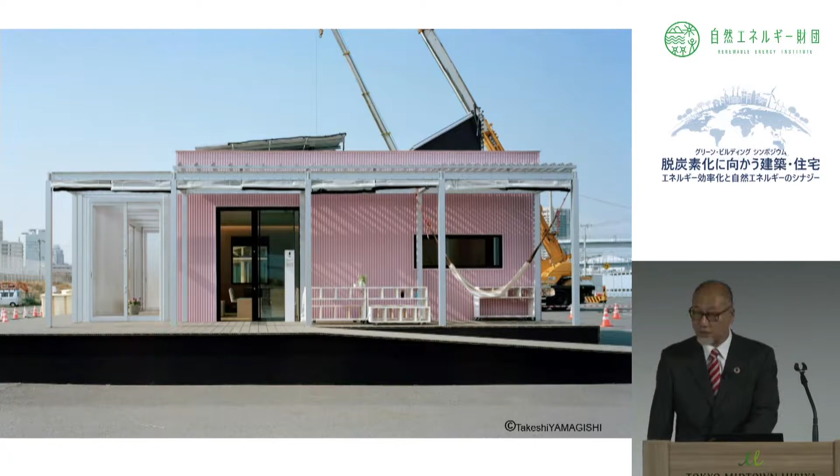ZEH. Mr. Oyama will be talking about this later, so I will not go into details, but zero energy housing, very much in the detached houses. This is the Solar Decathlon, a competition of universities. We have also competed with our designs.

What is most important, traditionally, for photovoltaics there was the FIT program. By the end of 2019, we all have to graduate from the FIT tariffs, which means increasing in-house consumption will be critical. This is our proposal. Estimating the sunlight, traditionally EcoCute would have been used during the nighttime to warm the water. But if the forecast is that tomorrow it is going to be sunny, that can be done the next day. Then it can be used as a storage battery, and the operation pattern can be adjusted. When the heat pump is used during daytime, it is efficient because the temperature is higher. So these are some of our advanced research areas.

Not only batteries, but heat storage is another important factor for collective housing. The definition of ZEH is also required for collective housing, and this is the definition for multi-family apartment buildings, for the entire building and for each dwelling unit. For the whole building, it would be difficult if it is multi-storied or high-rise, but from this year, subsidies are available, and of course, ultimately LCCM.

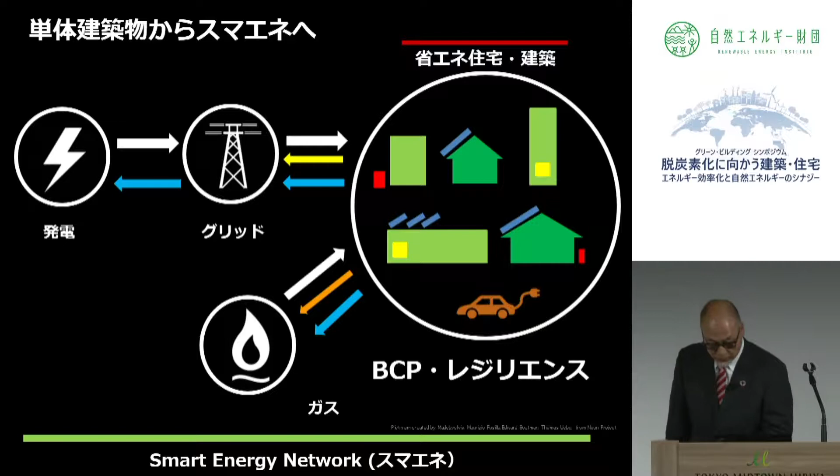Traditionally, from a single unit, it would be an entire smart energy network. Efficient use of energy for the entire network. It should be another definition. It's not energy conservation. Amory says energy efficiency. IEA also says energy efficiency rather than saving or conservation.

RE100. Promoting REs, there are many organizations and entities. Ricoh, Sekisui, ASKUL, Daiwa House, major Japanese companies are also declaring that they will go 100% renewable. This is exactly ZEB. So if zero energy buildings increase, it's a contribution to RE100.

As Professor Murakami mentioned, there are the SDGs. 7.3, to double the energy efficiency by 2030. So this is the ZEB-ready definition, a 50% energy reduction. If the operation is the same, it would be the same reduction, but at the same time, GDP should be expanded. And for promotion of that, there is ESG investment.

Large enterprises follow this principle, and then there is divestment, which is the reverse of investment, withdrawing or discontinuing investment. They will decide not to invest. They will pull out, withdraw investment, which is a major impact.

Regarding ESG investment, it's not only making money or being profitable, but non-financial or pre-financial information. It's not yet financial information, but it could be a progenitor to financial information. The non- or pre-financial information includes ESG: environment, women's advancement, comfort, wellness, or governance, including fair competition, that it is not unfair. The stock price will go down when corruption is exposed. Particularly in Japan, there is GPIF. We have a massive whale-sized pension fund, and this is promoting this investment.

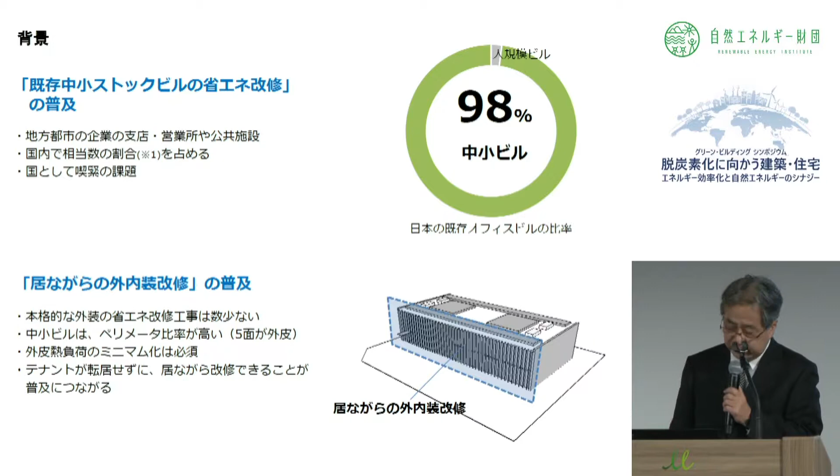So how to reduce energy consumption in the existing small and medium-sized building stock? That is the challenge. Offices smaller than 10,000 square meters account for 98% of the offices in Japan. In smaller buildings, the envelope accounts for a larger percentage. The challenge is to improve energy efficiency of the exterior, but it is important that the tenants can remain in place and do not need to temporarily relocate.

This building was first completed in 2003 and used as an office for 12 years. From October 2015, it was retrofitted within 6 months, and the refreshed building has been used since 2016. This is the inside after the renovation. On the left-hand side is the workplace. On the right-hand side is the communication area, the shared space. There is a glass partition surrounding the filing area. The northwest and southeast are full curtain wall.

This is the spec. It is in Chiba City, 2 stories high, with an area of 1,318 square meters, not a large office. The concept of the retrofit has 4 points. First, emphasis is on comfort. Daylighting and natural ventilation are utilized at maximum. Temperature, humidity, and airflow are controlled to make it as comfortable as possible.

The second point is energy consumption reduction. First, the insulation of the envelope and sun shading are thoroughly improved, with LED lighting, radiative air conditioning, and direct use of geothermal and solar heat. Number 3, change the work style. Workers share the common space so the plug load can be reduced. Number 4, as a result, energy consumption goes down significantly, so uptime becomes longer. Using renewables, BCP performance enhancement is part of our goal.

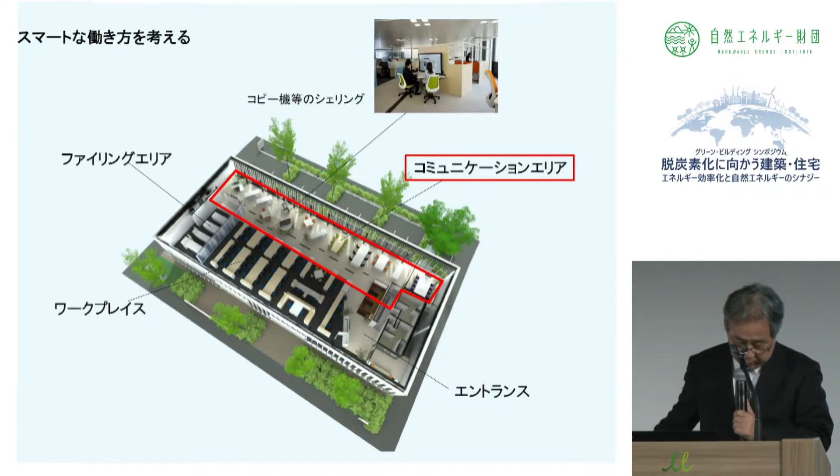The point is that the building design, system design, and operation are all designed in an integrated manner. The client, designer, builder, manufacturer, and tenants or users share the concepts from the beginning, and the goal is to realize the plan within the planned budget. To work in a smart way, workers can choose where to work, the working place, communication area, or filing areas, which is an improvement of the universal office design.

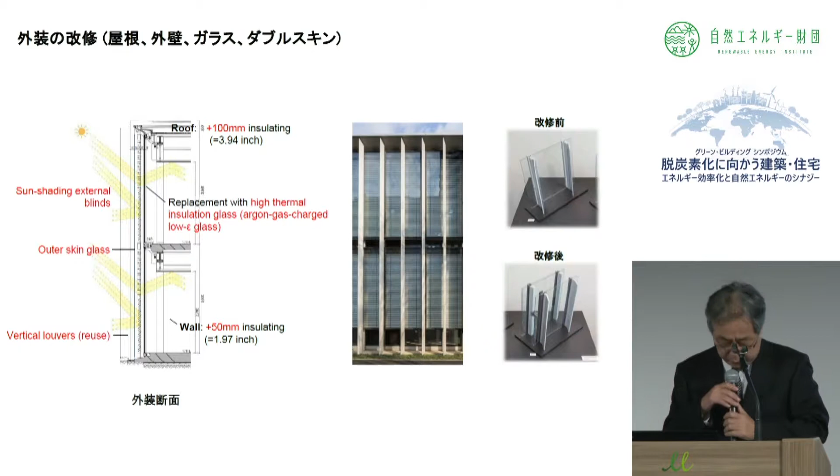Multiple technologies are deployed, but I will briefly introduce them. For the exterior, not super windows but highly insulated glass, with a second glass and an external blind. It's double skin, reducing perimeter load by 60%, with low-E glass and argon gas in the cavity. 1.2 is the level. As Dr. Lovins said, it's not exactly a super window, but compared to low-E glass, the level is half.

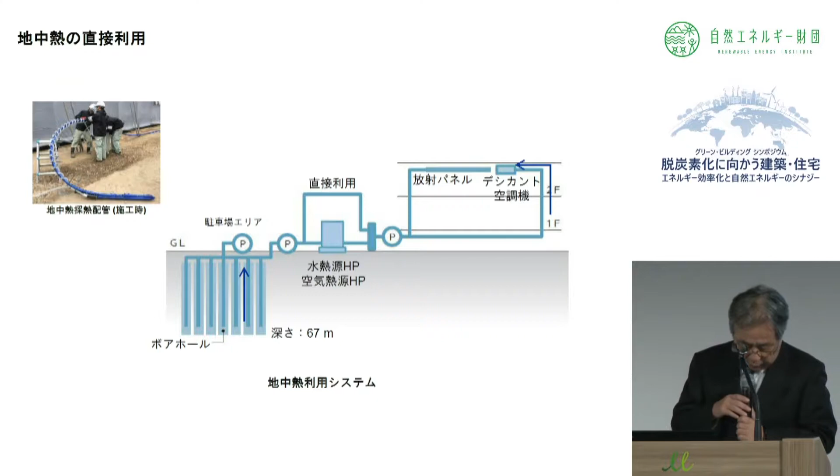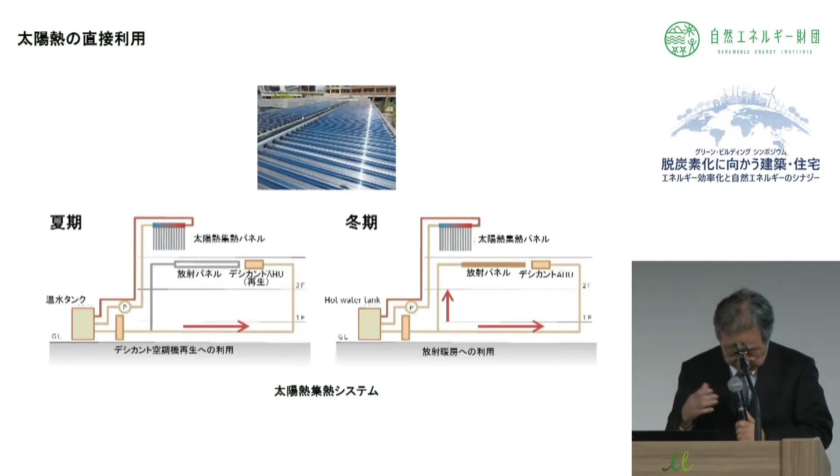During summertime, a borehole system collects geothermal heat and sends it directly to the ceiling panels for radiative cooling. What is not sufficient is backed up by a heat pump chiller. During summer, heat collection panels warm the water. Desiccant air conditioning, which I will talk about later, conducts dehumidification. In winter, hot water is sent to the ceiling for heating, and if it is not enough, a heat pump backs it up.

As for the effect, for cooling in summer, direct use of geothermal covered 40% of the required energy. For heating in winter, solar heat accounted for 20%, and the heat required for desiccant air conditioning in summer was fully covered by solar heat.

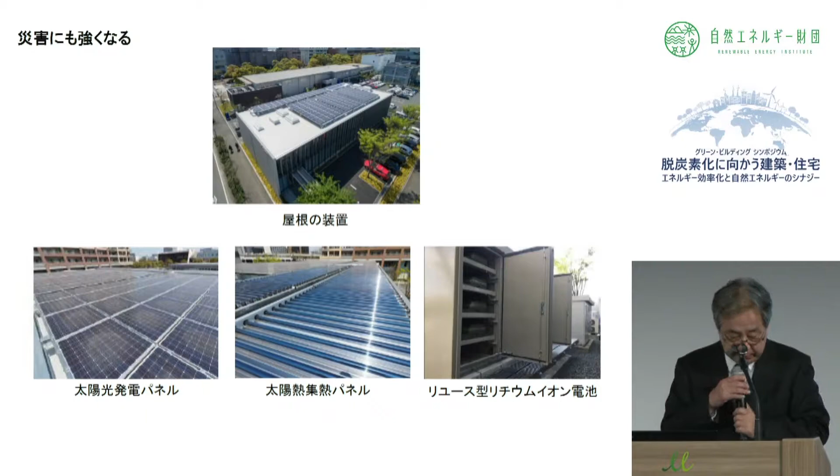To prepare for disasters, solar PV panels, a solar heat collection panel, and reused lithium-ion batteries are prepared at the minimum required level and are constantly utilized. And this is the plan to reduce the energy consumption.

So by the plan, technology, and the operation, the actual energy consumption for the building, 1,400 megajoule per square meter per year, has gone down to 400. The remaining 30% should be covered by solar power. This is the before-retrofit estimate, after the retrofit, and the actuals after the retrofit. And the result is almost close to our planned goal and realized net zero energy.

And the LCC based on this. In the case of retrofit, by reducing the energy cost, the payback is roughly 20 years. If this is newly built, the payback will be 14 years. The work intellectual productivity will rise, overtime goes down, and then the payback will be 12 years or 8 years, respectively.

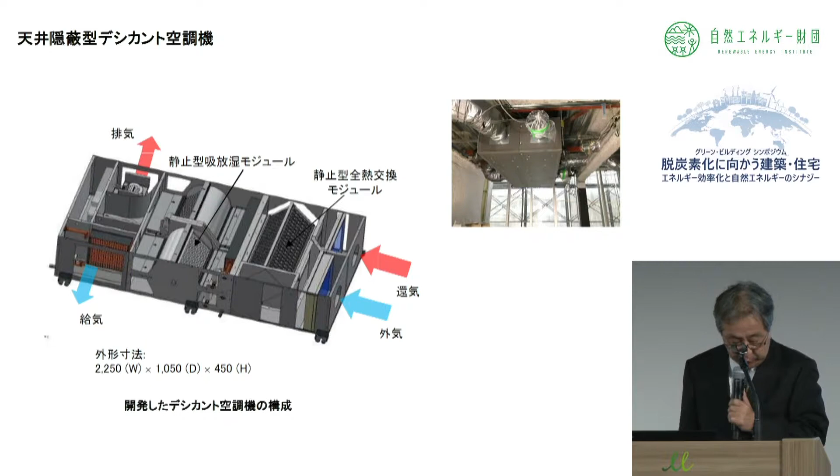And next is about how to control the air conditioning. There is the ceiling radiative air conditioning, desiccant air conditioning, a personal diffuser, and natural ventilation; all are automatically controlled. And the desiccant air conditioning is hugely compact. We have developed and we market a very compact, small size, which can fit inside the ceiling. So we realize low humidity during summer. There is a heat exchanger, and solar heat and geothermal can be utilized.

And this is the actual room temperature. In August, it was between 26 to 26.5 degrees Celsius, humidity 50%. In February, temperature 22 to 22.5 degrees Celsius, humidity 40 to 50%. In May, it's natural ventilation, and the distribution is wider.

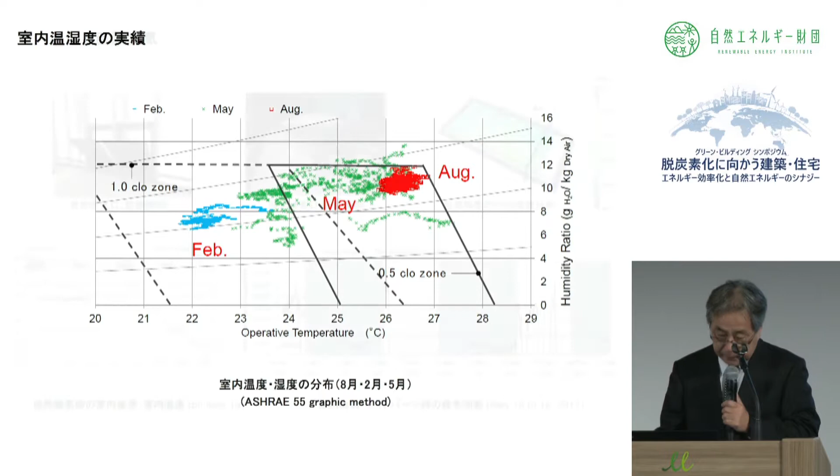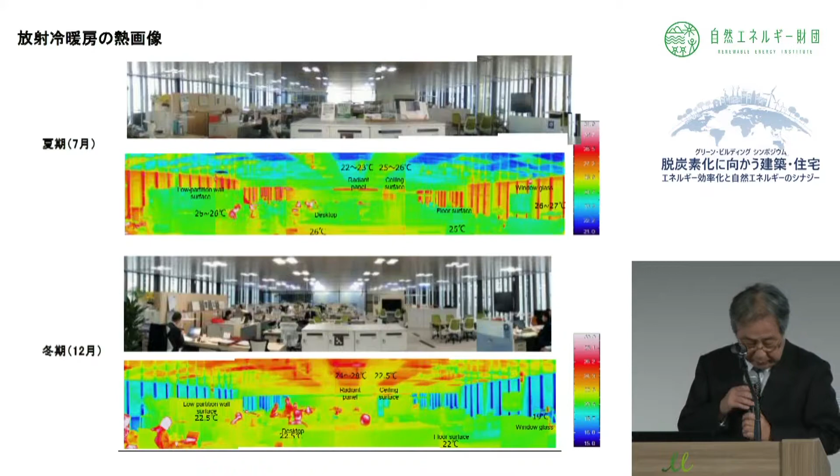And this is the thermal image for different seasons. In the winter, it's 24 at the ceiling, 22 at the floor, partition 22.5, 14 on the glass surface. So the temperature fluctuation is small, which means this is a very comfortable radiative environment for the workers.

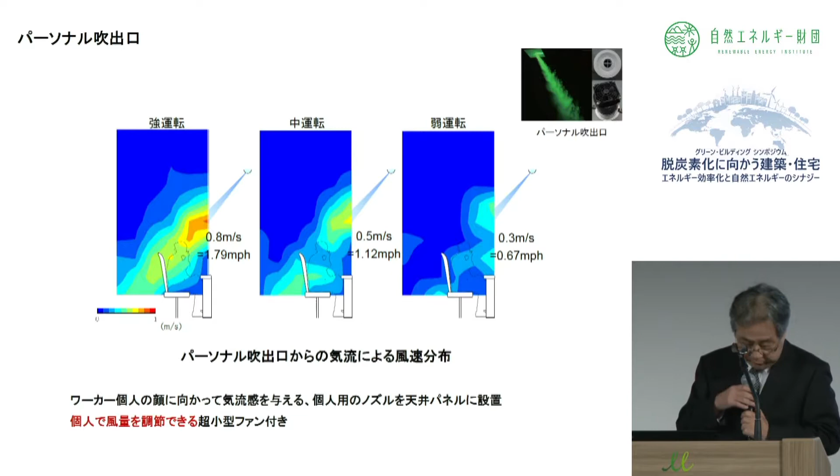And this is the personal diffuser. So directly to the face of the worker, there is an airflow. This is a personal nozzle installed in the ceiling, at strong mode. At the face, 0.8 meter per second is the speed. Workers enjoy this diffuser when they come back to the office from working outside.

Individual workers will declare whether they are comfortable or uncomfortable. By integrating this, personal fan strength and radiative panel temperature are changed depending on the individual in order to improve the comfort for each and every worker. This is still in a test period, but already we are seeing rising satisfaction by all the workers.

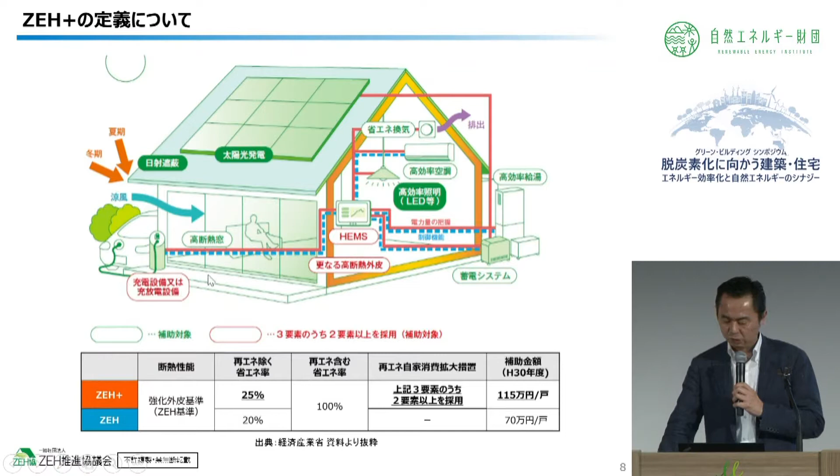So you have the ZEH and ZEH Plus, and the subsidy is 700,000 and 1.15 million yen. And so there are three aspects included. First, further insulation, so greater energy conservation in ZEH Plus. Second, a home energy management system is also introduced; in other words, the remote control of electrical appliances can be done. And the third is EV charging or discharging. So these are the requirements.

And I talked about the FIT price coming down. And if the FIT purchase price comes down, and even in the after-FIT period, that will be sought after. And the next step for ZEH is to expand the self-consumption ratio, with the three points I've talked about. First is that we want to maintain the heat from the daytime to nighttime. In other words, high insulation, which will lead to reducing the heating energy during the nighttime.

The second is usage of EcoCute and things like that during the daytime, not using the nighttime electricity, but using surplus electricity from the daytime to account for heat. And the third is charging of EVs, using surplus electricity for cars. And through these usages, we want to increase the self-usage rate.

And another reason why we need to see greater usage of ZEH Plus is that output control is becoming an issue. I'm in Kyushu, so this is attracting a lot of attention. And normal people who are planning to build houses are starting to ask questions.

This is on the 3rd of May this year. The line graph is showing the demand and the bar graph the actual volume for the 24 hours, with a peak of 85% by solar, and the others nuclear and coal-fired. And because the supply-demand balance is collapsing, pumped storage and also the interconnection are used to match the same quantity at the same time in order to prevent a blackout. This type of work has already started.

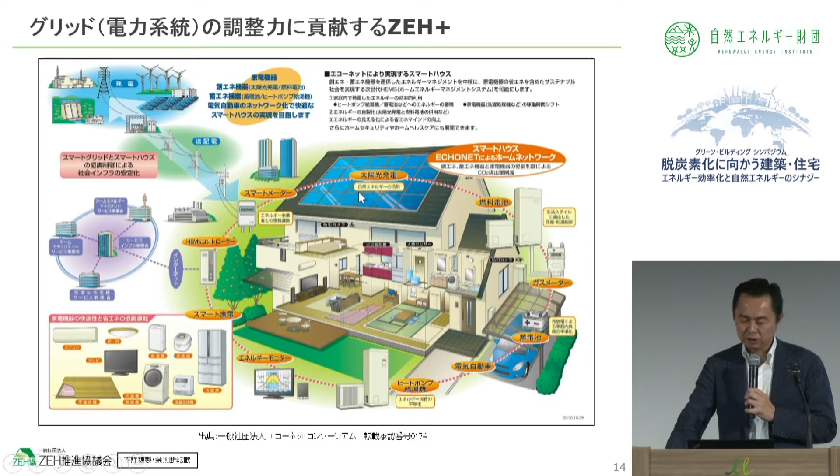And today is an event of REI, and so the expansion of renewable energy is going to be a big theme, but the residential part will play a large role as well. As a whole, we want to contribute towards a greater usage of renewable energy, and that is the measures under ZEH. And I'd like to complete my presentation.